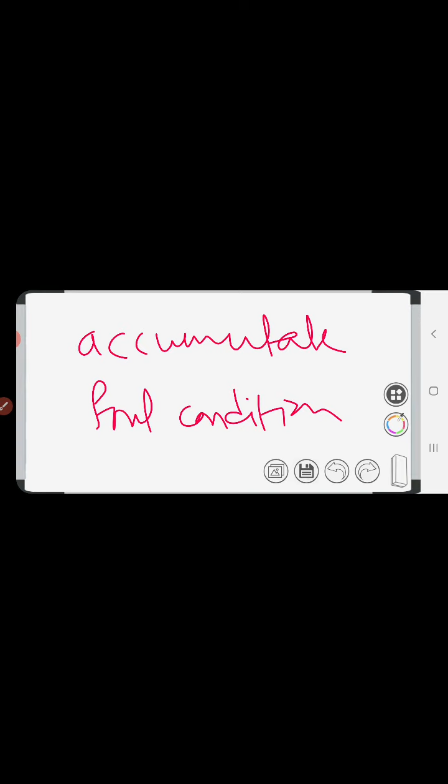In addition, disease bacteria will breed in the stagnant, stored water. This results in the health of the public being in danger. Potable water will also get polluted. So a totally insanitary condition will develop in the town, and it will become impossible for the public to live in the town or cities.

So to keep the potable water of good quality, to protect the health of human beings, to decrease the breeding rate of bacteria, and to keep the town or city healthy and clean, it is necessary to carry out proper building sanitation.

Thus, to keep the town or city healthy, there is a necessity to treat and dispose of the water properly. So sanitation is very important. Building sanitation is very important. This is about the importance and necessity of building sanitation. If proper arrangement of collection, treatment and disposal of all types of waste produced from residential buildings is made, then sanitation can be maintained.

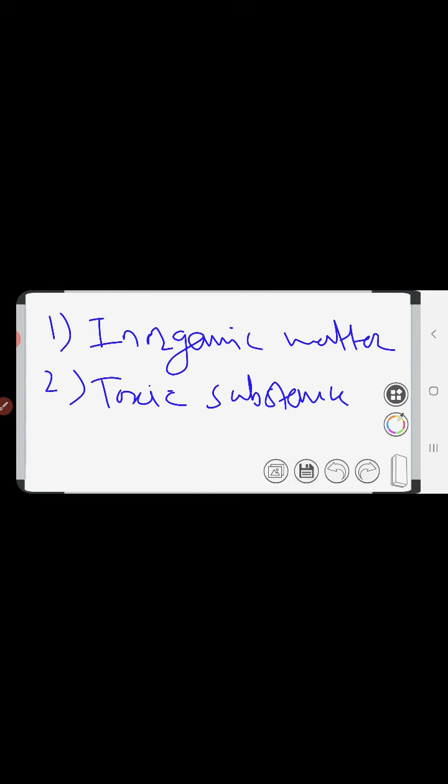second, to remove the various toxic substances present in the sewage, which may cause bad effects on aquatic life when discharged directly into water bodies where aquatic life is present. Also, to kill pathogenic microorganisms, it is necessary to treat the domestic sewage.

Another one is to reduce the organic matter from the sewage. Along with the inorganic matter, it is also necessary to remove the various organic matter present in the sewage, which can be removed with the help of treatment of the domestic sewage. So these are the necessities to treat domestic sewage.

Then we see the various terms or definitions used in building sanitation. There are various terms related to building sanitation, some of which we discuss here. The first and most important term used in building sanitation is sewage.

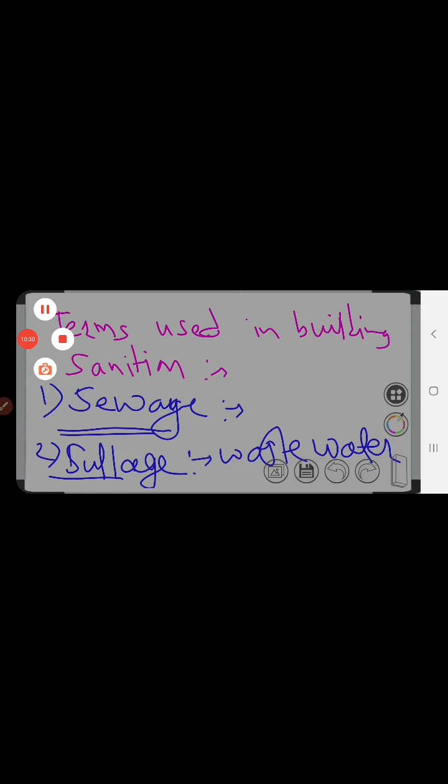Next term used in building sanitation is types of sewage. There are mainly two types of sewage. First one, domestic sewage.

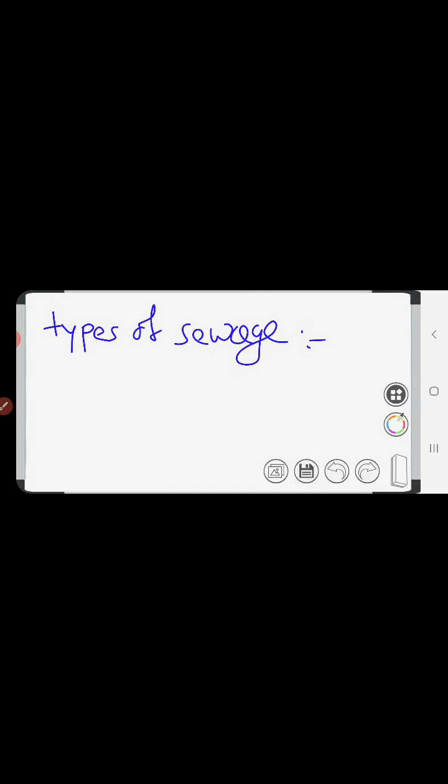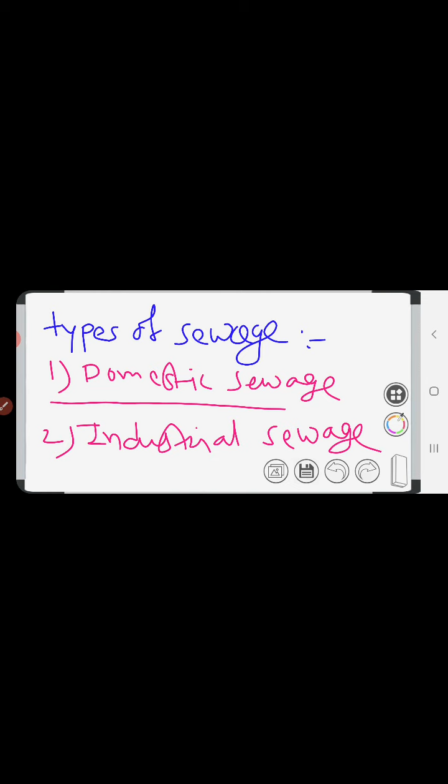And second is the industrial waste, industrial sewage. So simply domestic sewage means the sewage liberated from the kitchen and bathrooms of the residential buildings, means the sewage liberated from the residential buildings is called as the domestic sewage. And industrial sewage, the sewage liberated from the various industries is termed as the industrial sewage. These are the types of the sewage. Basically these are two types, domestic and industrial sewage.

Next term involved in the building sanitation is the water pipe. So what is water pipe? The pipe which is used to carry the water with high pressure. The pipe which is used to convey the water, to carry the water under pressure is known as water pipe.

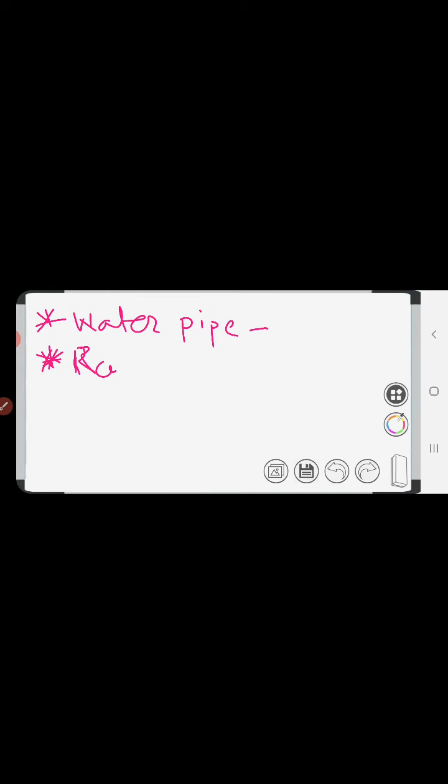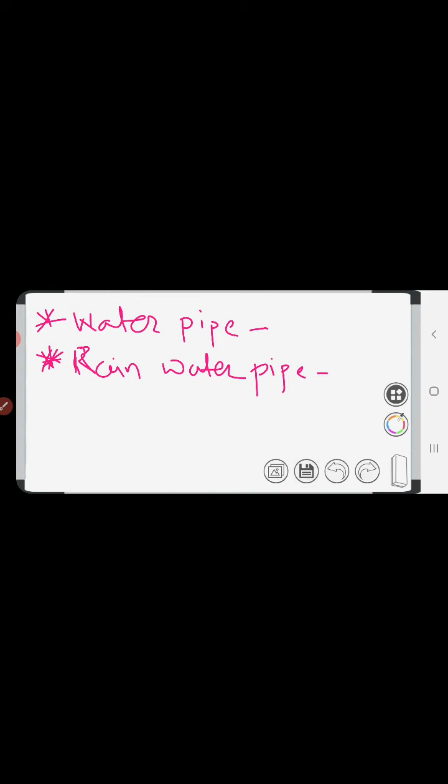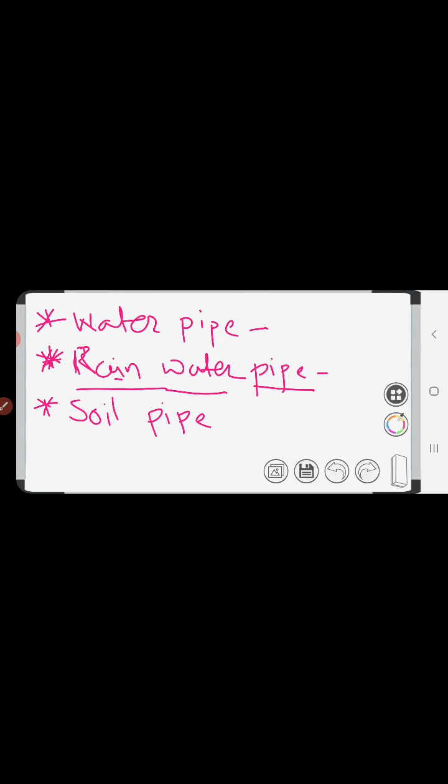Next term is the rainwater pipe. So what is the rainwater pipe? The pipe collecting the rainwater from the roof of the residential buildings is called as the rainwater pipe. Next term is the soil pipe. The pipe carrying wastewater from the water closet, WC, is termed as a soil pipe.

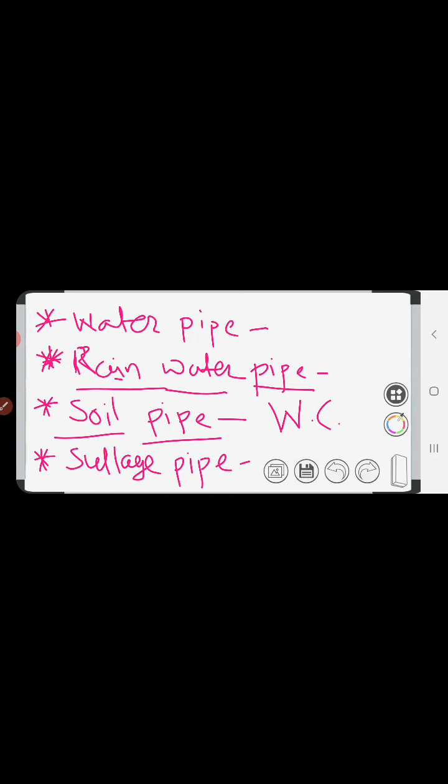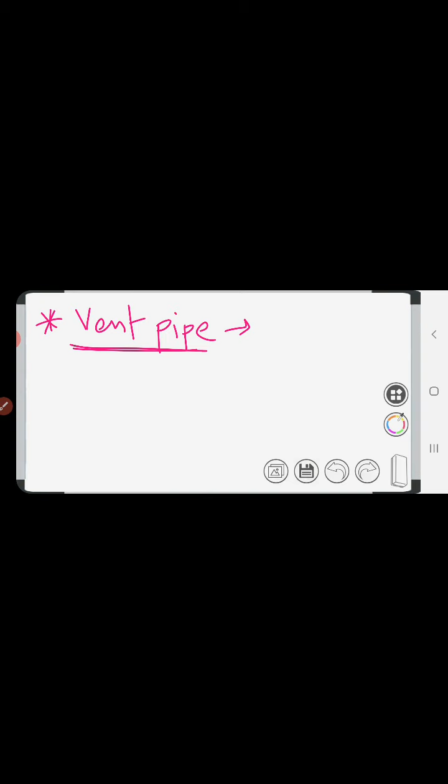Next term used in the building sanitation is the sullage pipe. The pipe carrying the wastewater from sink and bathroom is known as a sullage pipe. Next term used in the building sanitation is the vent pipe. The pipe which is used for the purpose of ventilation is known as vent pipe. These are the certain terms related with the building sanitation.

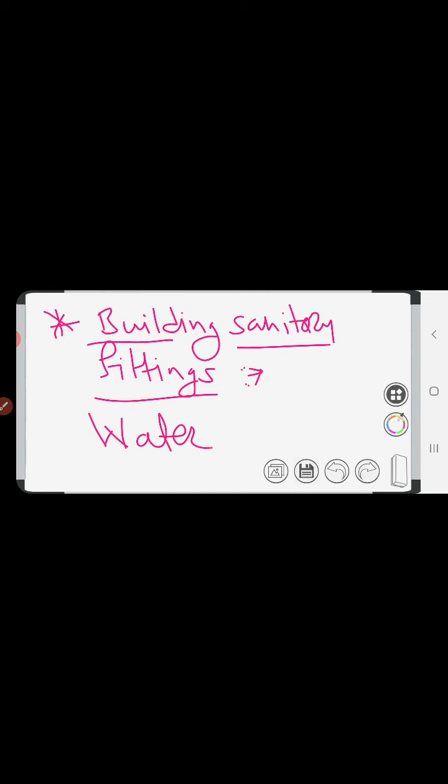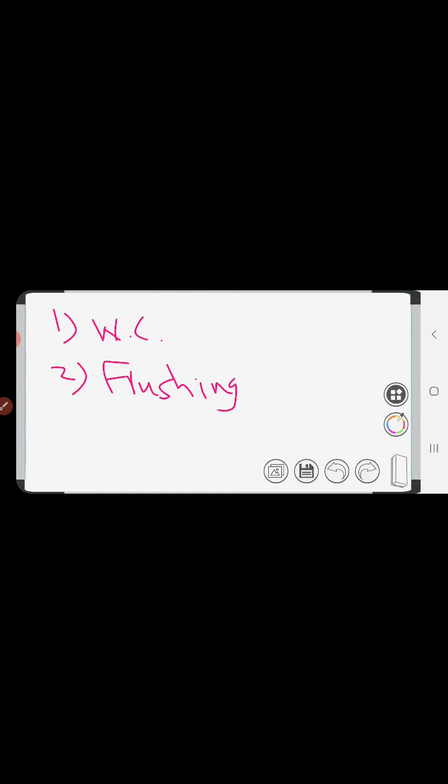Next topic is the building sanitary fittings. There are various types of the building sanitary fittings. Number 1, water closet. Number 2, flushing cistern. Number 3, wash basin. Number 4, urinals. Number 5, sink. These are the important building sanitary fittings used in the building sanitation. In this video, we will discuss on the water closet.

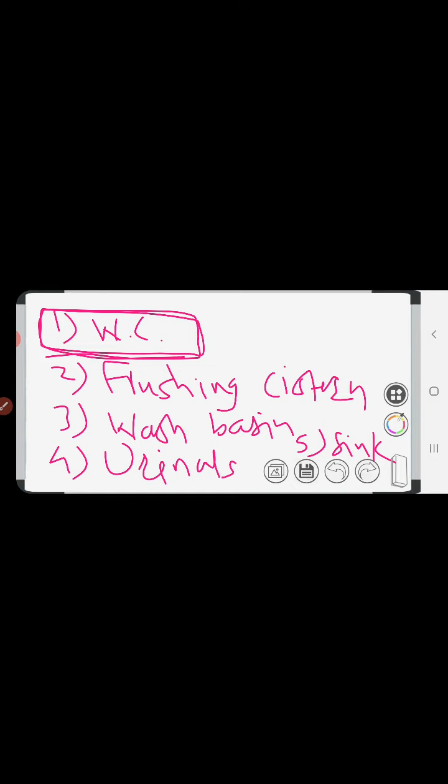Water closet is defined as a sanitary fitting which is designed to receive the human excreta directly from the person using it. It is one of the important sanitary fittings. Or the room in which it is installed is also known as the water closet.

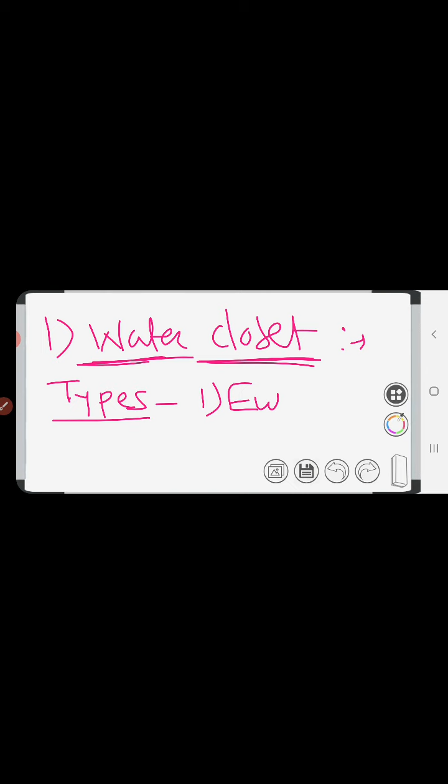There are two main types of the water closet. Number 1, European type water closet, and number 2, Indian type water closet. So first type, that is European type water closet. It is usually made of porcelain material. The pan has a flushing rim to spread the flush water.

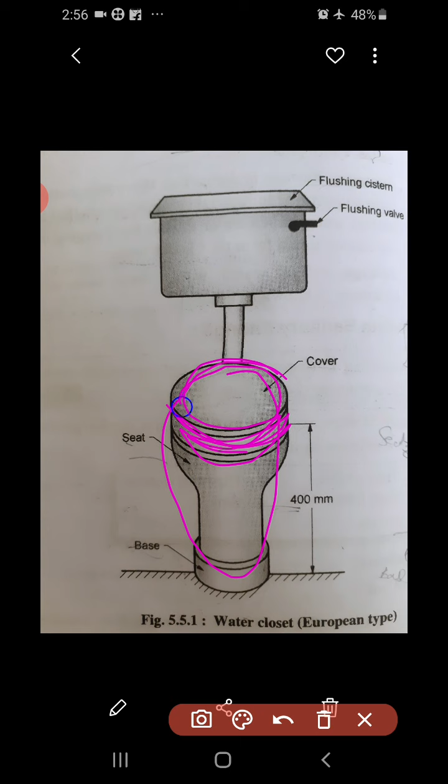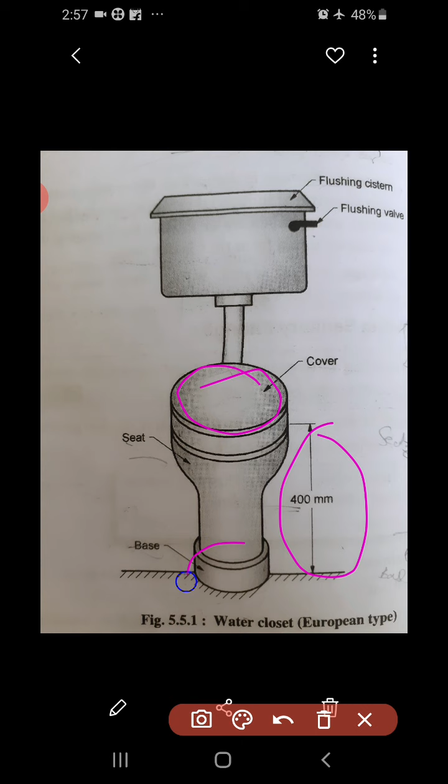If I see this image, this is of the European type water closet. It is a pan which has a flushing rim on this side to spread the flush water into the pan. A cover is provided at its top. The excreta fall directly into the trap, and with a good flush of water, the pan remains in the clean position with the help of this flushing cistern. It is about the European type water closet.

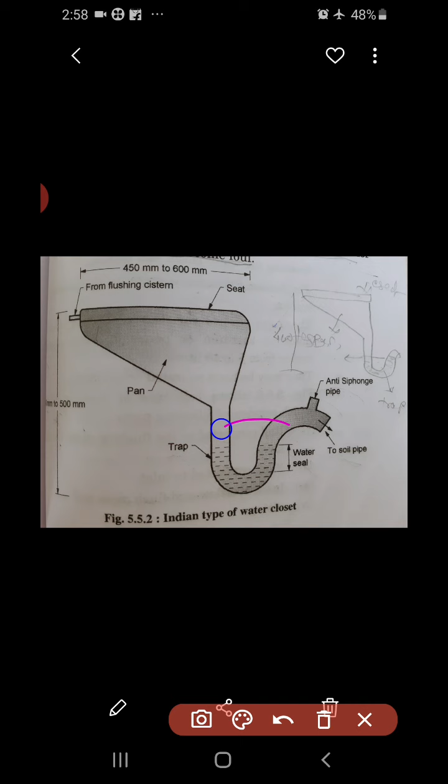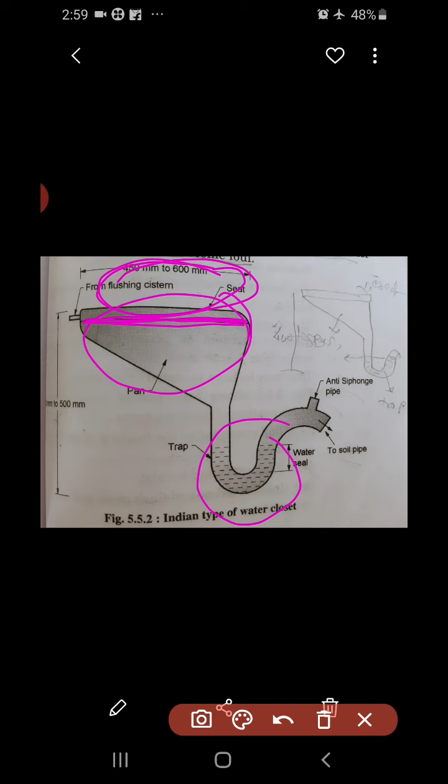Next type of the water closet is the Indian type water closet. It is usually made of the porcelain material like the European type. The pan and the trap are two different parts. This pan has a flushing rim on this side to spread the flush water. In such type of the water closet, there are chances for the excreta to become foul. The dimension of the Indian type water closet is given. Separate traps are provided. So all this is about the water closet, one of the important building sanitary fittings.